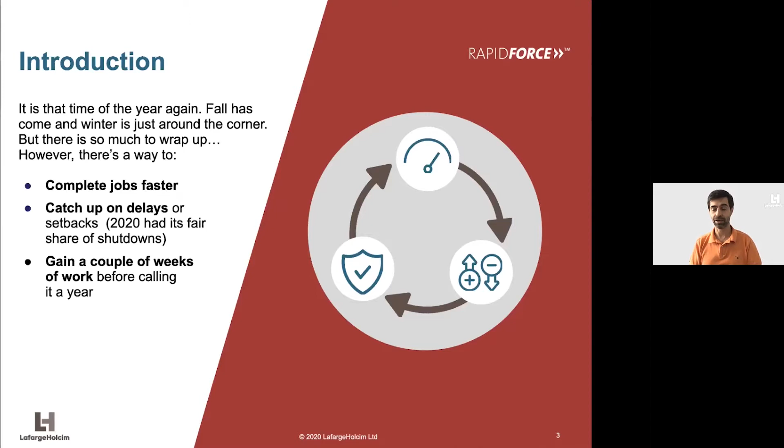So to begin with, and maybe you can hear it on my voice, fall is already there, at least for most of us, and winter is just around the corner. So it's really that time of the year again. We've got quite a few projects to wrap up, and 2020 had its fair share of delays. So really what today is about is completing jobs faster, catching up on delays that we may have had during the year, and really try to make the best out of and gain a couple of weeks on winter before we can call it a year.

Now, what is Rapid Force? Dan mentioned it - it's about high early strength, but it's really more than just high early strength. It's a range of concretes within which we can really play at will with what we want to do in terms of strength gain and at what pace the strength will ramp up. And it starts from 4 hours, where we could imagine removing the formwork on a wall just 4 hours after batching, up to a more conventional solution around 2 days after batching. So that's really a complete range.

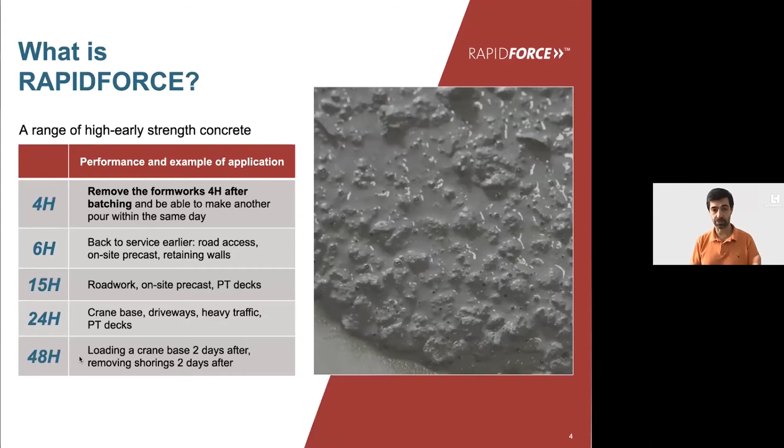And what makes it different from the conventional high-early concrete that we're all used to is really about what it's designed for. If we look at what conventional high-early is, well most of the time it's basically adding a set amount of accelerator, 1%, 2%. So it's basically taking an existing concrete and putting a fixed amount of chemicals. At the end of the day, the target is to fasten the setting time, but really not impacting the overall strength gain, or not looking at the level of strength we're achieving at a given point in time.

And more often than not, it also comes with a requirement to put extra manpower to accommodate for the quicker set time and make sure that you finish it before it gets harder. So that's really a basic way to do high-early, and it's more about setting than really strength.

On the other end, rapid force is all about strength, and the way we're designing these mixes and the reason why there is a range is because we design for a given level of strength at a given time. So it's not about making sure that the concrete sets faster. It's about achieving a level of performance at a given time.

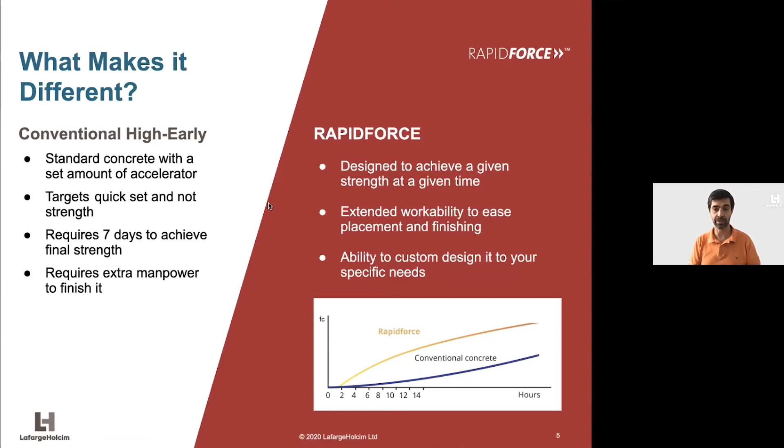So what is important to have in mind, knowing that before ordering? Again, Rapid Force is designed with you in mind first. So really for me, the critical question to ask first is: is time to serviceability important to you or your customer? Does time matter? And obviously what I mean by time is being able to be really quick. If the answer is no, then this is probably not the right product for the purpose.

If the answer is yes, then it's important to know what the service requirement means. What level of strength do you need to achieve? At what time to really get the benefits out of it? And once you know that, our team locally will be here to help you make the right recommendation in terms of mix and propose the right mix for the application. So that will set the base and the scene.

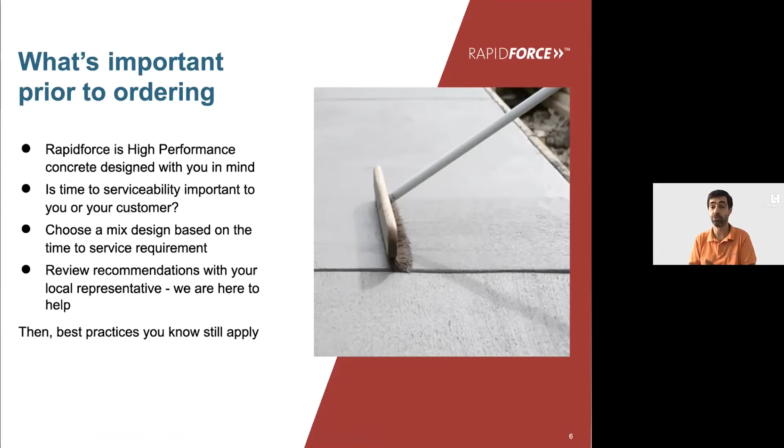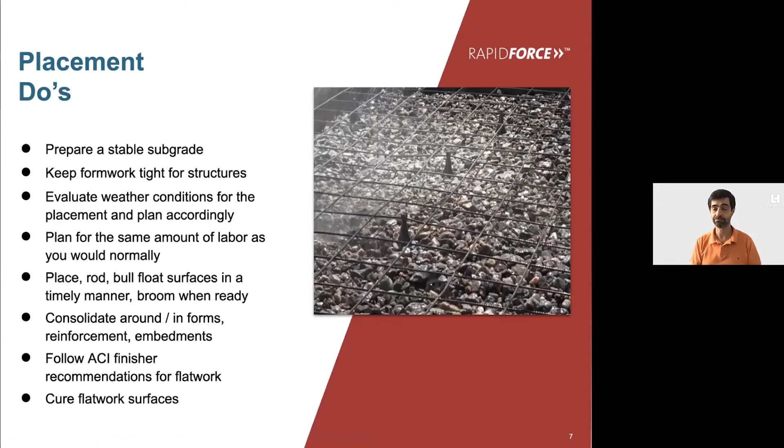Now, when it comes to application, well, the best practices that you already know still apply in this case. If you're doing flat work, it's important to have a stable subgrade. If you're using formwork, it's important that it's tight and stable. Obviously, if you're pouring material, again for flat work outside, it's important to evaluate the weather conditions up front and plan accordingly. Finishing is fairly similar to what you're used to, and basically the recommendations you're used to for finishing still apply here.

Now, what's important to kind of avoid is to change completely the schedule, especially once you've started. Once everything is set and prepared, it's important to stick to the schedule. It's important to not do some last-minute changes in the middle of the pour, because you're at risk of having to rush all over the place to make it work properly, because the workability is extended, but once it starts, it starts. So you have to make sure that you stick to your plan. Otherwise, you would struggle to keep up with the open time.

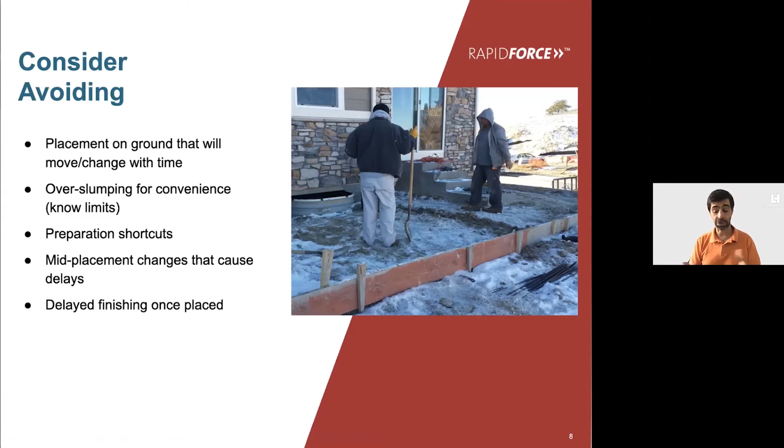And while we can cover a wide range of slump for convenience, depending on the application, targeting too high a slump might lead you to some constraints as well. So it's important to make sure that you target the right level of slump for the application. But beyond that, really no difference from conventional concrete.

Now let's look at a few case studies that I think will illustrate pretty well what this concrete can do. We'll start in New Orleans, which is kind of contradictory to my first pitch around fall and winter being around the corner. New Orleans winter is pretty mild, but in this case, the city was facing a significant challenge with a big sinkhole in Canal Street, and that's a pretty busy area.

So they gave a challenge to the contractor to repair and finish the work in less than 90 days, and they had to build some walls to reinforce the entire subbase and then cover it, etc. So that was quite an extensive amount of work, and they had to complete it within 90 days for the city to accept the plan.

So we came up with RAPIDFORCE tweaked for the purpose. Again, they had to cast walls, etc. So what we did is we designed a concrete that was achieving the required strength in 24 hours, so that they could basically really not worry about the load-bearing capacity and move to the next steps really fast. And doing this, we've been able to complete the project in 39 days compared to the 90 day limit that the city gave initially. So you can imagine how important it was for the city, but also for the businesses around this area to be able to open this street for traffic and generate revenue again, and also not end up with huge traffic jams for a long period of time.

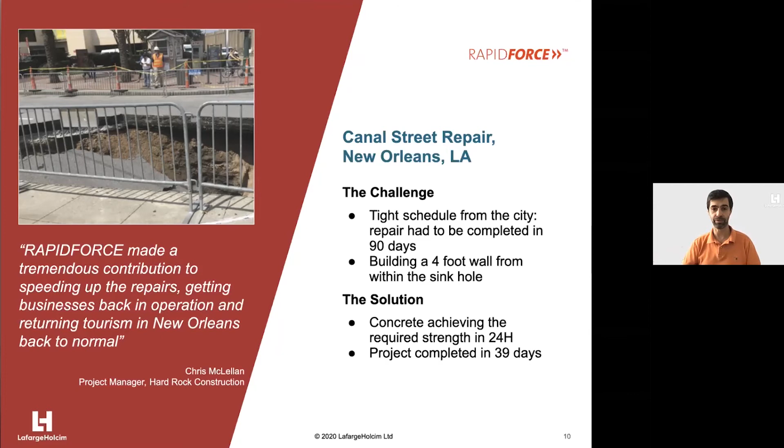Another example, probably a little bit more straightforward in how we can link time and value, and back to the question I was mentioning earlier, is time of essence for the end customer, and then what's the requirement.

That's a project we did in Minnesota, and the gas station here needed to repair the lanes. Obviously, when you have to tear down the existing concrete and replace it with a new one, this means that lane is closed for business. So if it's closed for business, this is obviously a drop in revenue for the owner of the gas station. And if he has to wait 7 days to open it back to traffic, or even 2 days to open it back to traffic, that's obviously 2 days of lost revenue on that lane.

So we came up with a solution together with a contractor to be able to open the lanes back to traffic in 24 hours. Minimal disruption, which of course leads to a way lower loss in revenue for the owner of the gas station. So it's really a win-win, able to complete the project faster for us and the contractor, right? But it's also a big saving for the owner of the gas station and the end user. So actually the biggest value is on the end user part of the deal.

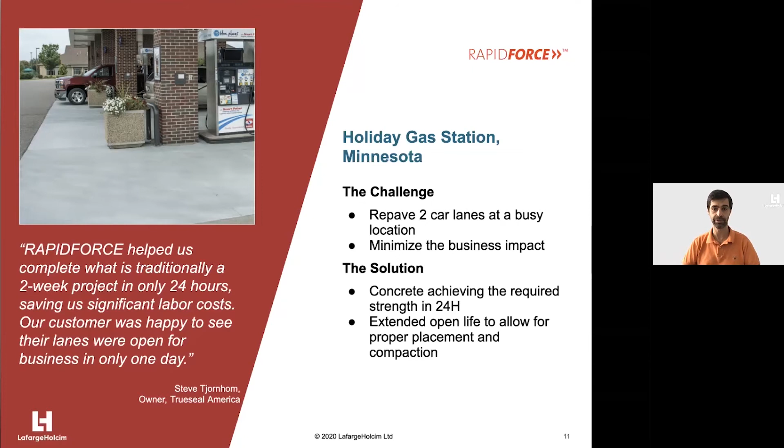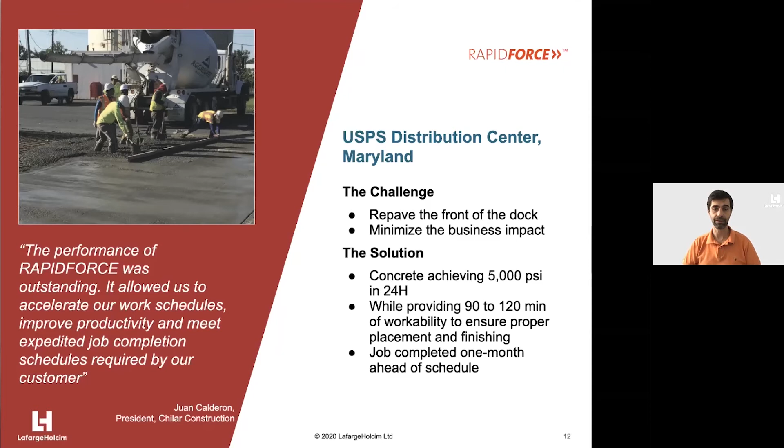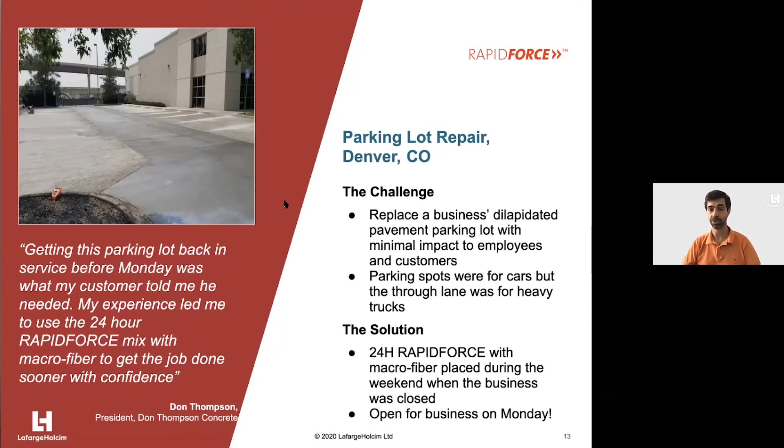So at the end of the day, RapidForce is not just an all-set technology that we can't combine with something else. This job is a good example of our ability to combine several technologies together to make it really a time-saving and money-saving solution for all the stakeholders involved in the job, the end user, the contractors as well.

That's really the gist of RapidForce. Thanks again for your time, and now we can maybe move to questions.

I had a couple questions show up in the Q&A, and the first one is, how long do you consider delay in finishing? Is it hours or minutes? So no, it won't be minutes, right? Especially if the question is around changing your plan in the middle of the pour, we're not talking minutes here.

Remember that we design it for 90 to 120 minutes open time for placement. We're talking about half an hour, an hour. If you end up creating a little bit of a change in the process, it's fairly easy to lose half an hour here and there, and then suddenly you're not at 120 minutes, you're at 150. So you're way more at risk of getting a cold joint. That's why we're putting some emphasis on sticking to the plan, making sure that if you think you might have to change in the middle, it's important to prepare for it upfront and have a backup plan if need be. But definitely not minutes.

Another one would be, have you used this with shotcrete at all? And I'm thinking she maybe meant, can you make a RapidForce brand of shotcrete, perhaps?